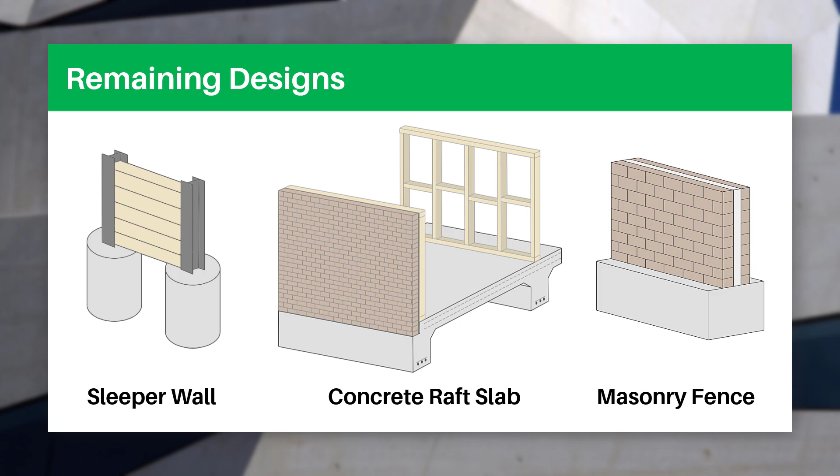In our previous video, we went through our brace frame design, and now we're up to designing our concrete raft slab, our front masonry fence, and the timber sleeper retaining wall to the rear. We'll go through the raft slab first and cover the fence and retaining wall later in the video.

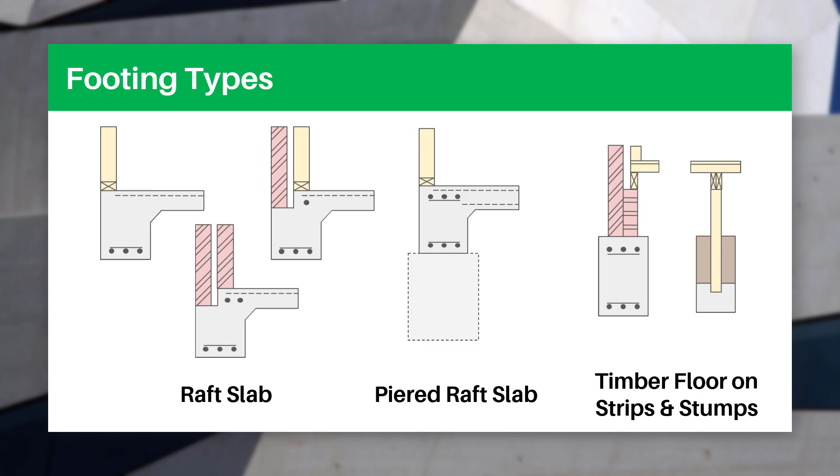Now, depending on the kind of footing system you need to design, your approach to designing it will likely differ a bit. Determining the most appropriate footing system is heavily dependent on your soil profile. We spoke a bit about our soil profile in the first episode, where we first set out our slab. So we'll give a brief overview now.

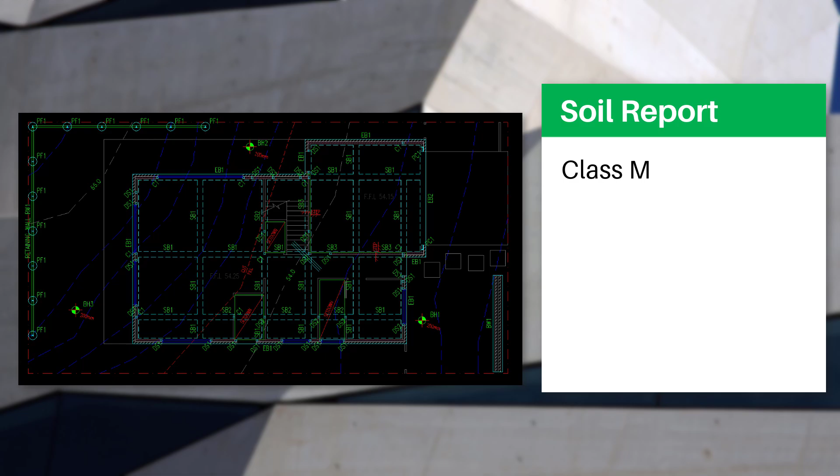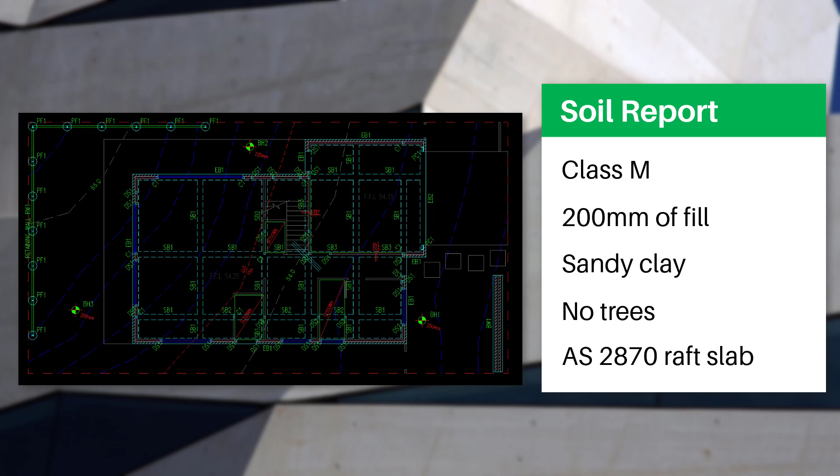Based on our soil report, our site is Class M, and we have roughly 200mm of fill over our sloped site, with our underlying founding material being sandy clay. There are no nearby existing trees or trees that will be planted. Under these conditions, a deemed to comply raft slab from AS 2870 would be appropriate. We'll be founding the beams directly into our sandy clay founding material.

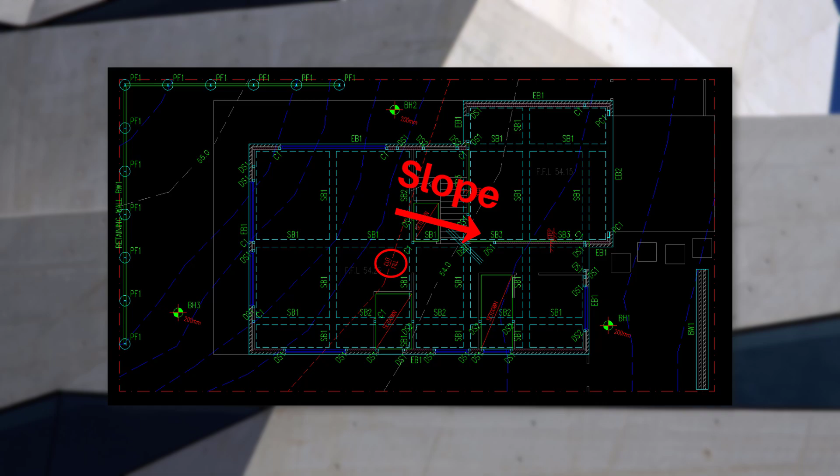In our first episode, we went through in detail the various rules and requirements for the set out of stiffening beams in a raft slab, and so we won't be covering that part of the design again in this video. As the site is slightly sloped, we will be building the site up a bit in areas. This, alongside there being 200mm of fill, means we will be exceeding the 400mm fill limit as specified in AS 2870 clause 2.5.3 for in situ and non-sand filling.

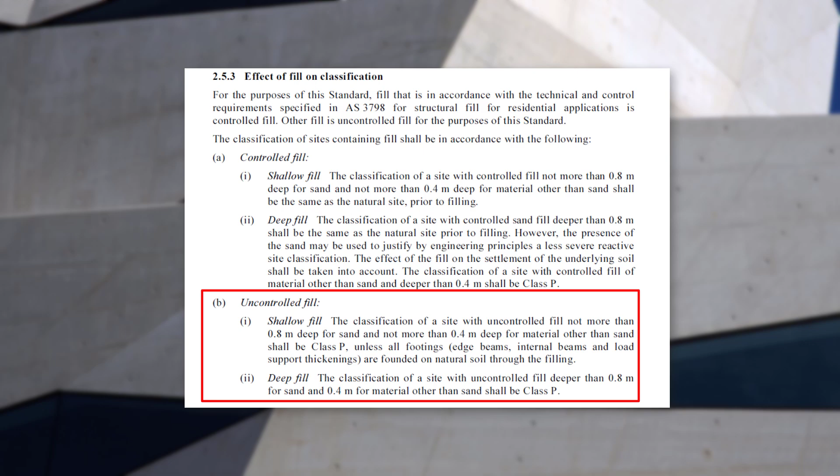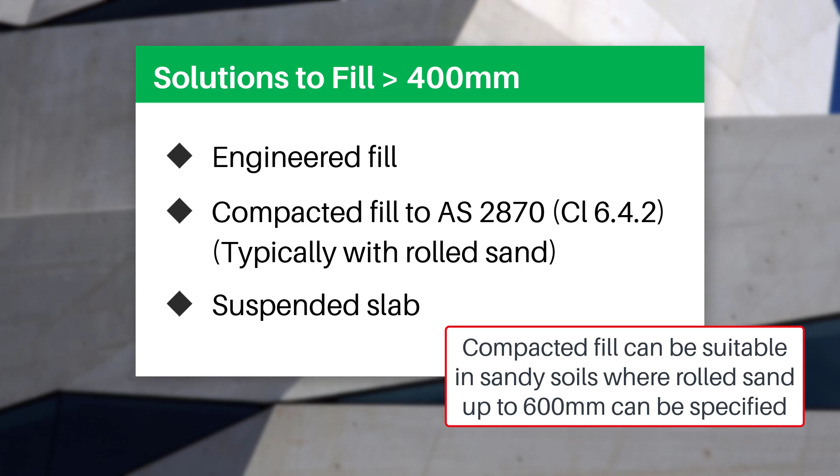There are a few solutions to this, such as engineered fill, or by removing the fill and building up in compacted layers as specified in AS 2870 clause 6.4.2, or by designing the slab as suspended, or in other words, designing the slab so that it can span from beam to beam with no support of the soil underneath. Engineered fill is uncommon for residential projects like this one, so it will likely be more appropriate to go for a suspended slab.

The first part of a slab design is working out where we need to suspend a slab panel. Although a simple approach would be to suspend the entire raft slab, if there are significant portions of it that don't need to be suspended, then this isn't very economical. That being said, the designer will also need to consider the varying performance of on-grade versus suspended when it comes to differential movement. A good way to work out where we need to suspend a slab panel is by calculating the levels of fill below points around various panels. To do this, we can use our finished floor level, contours and fill measurements to work this out.

On our plan, we'll start with the bottom right of our raft slab. Here we have a finished floor level of 54.25. To get to the start of our soil, we'll take off 100mm for the slab. This brings us down to 54.15. Now we need to work out at what level our fill ends. Looking at our contours, we can see our natural surface is about 53.65. We'll then need to go down 200mm from this to account for fill, which brings us to 53.45.

So taking our first calculated value of 54.15 and minusing off our 53.45, we get 700mm of fill. So we know as this edge exceeds 400mm, we'll need to suspend this panel. Going along to the next stiffening beam, we calculate out the fill to be about 600mm, then 450 and finally 350. As we've now gone below the 400mm limit, we know we can stop our suspended slab panels here.

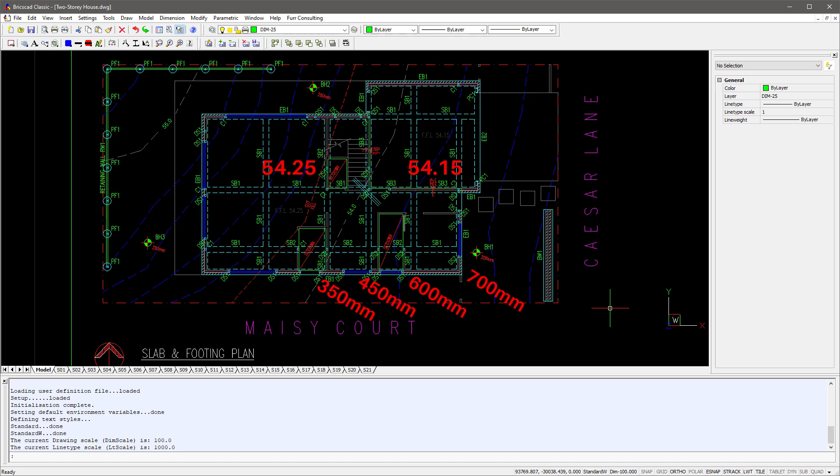However, as our natural surface level isn't uniform going from south to north, we'll need to calculate a few extra points to get a full picture of where we need to suspend. It's also worth noting that our garage floor steps down 100mm from the rest of the slab. With the rest of our points calculated, it will be useful now to draw a line to clearly show the point where fill goes beyond 400mm.

As a side note, a quicker way to go about this would be to just calculate the level where we need to suspend directly and then draw a line based on that. We went about it in a more detailed way just so it's clear what we were doing.

We can see that about half of our garage has more than 400mm of fill, and where we step up, the 400mm line extends into in front of the stairs. Any slab panel that's on the right of this line, or even crosses it, will need to be suspended.

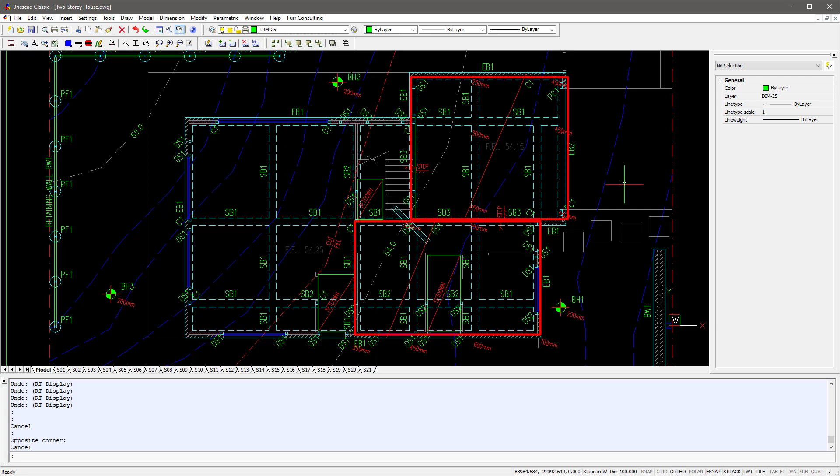We'll need to keep in mind that all these numbers here are somewhat approximate, so we'll want to stay conservative where needed. With that in mind, we'll be wanting to suspend our slab panels up to here for the upper level. For the garage, although technically we could skip the upper left panel, as it's quite small, it's going to be easier just to keep it consistent with the rest of the garage, and so we'll suspend it as well. So that it's clear which panels we are suspending, we'll also add a hatch to them.

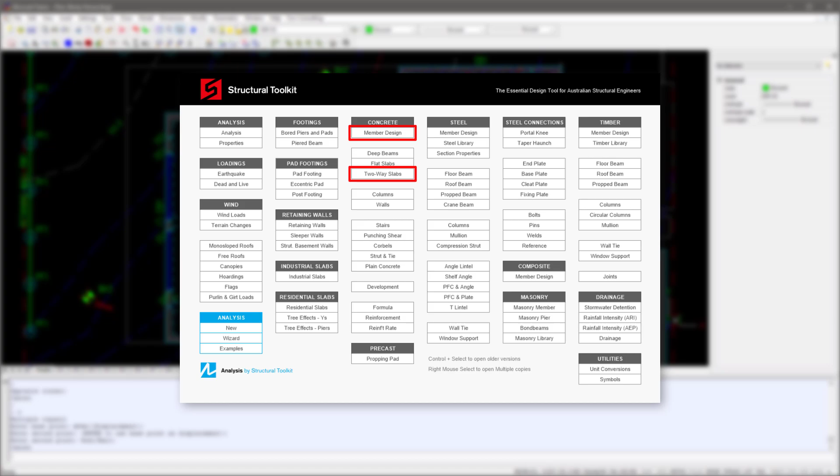With our suspended panels determined, we can look at designing them. We'll be designing them as a two-way slab, using the two-way slabs and concrete member design modules. We've done a video on this kind of design previously. There will be a link to it in the description below, so have a look at that if you're unsure about any part of the process.

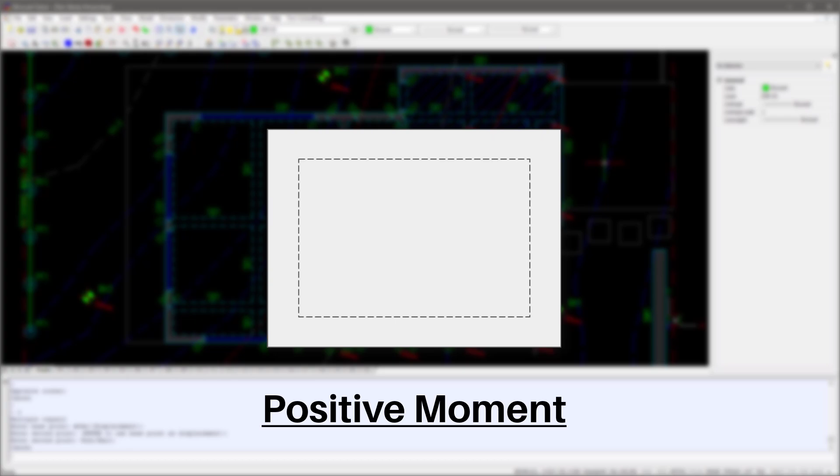We'll want to be selecting panels that will have the highest positive or negative moment in them. The highest negative moment is often found with a corner slab panel with two discontinuous adjacent edges, or a panel that only has a single continuous edge, being similar to that of the first span of a multi-span beam. The highest positive is then usually where there are no continuous edges. As you would expect, the bigger the panel size, the bigger the moments are as well, so there are a few things to consider. So keeping that idea in mind, we'll pick a few slab panels to design.

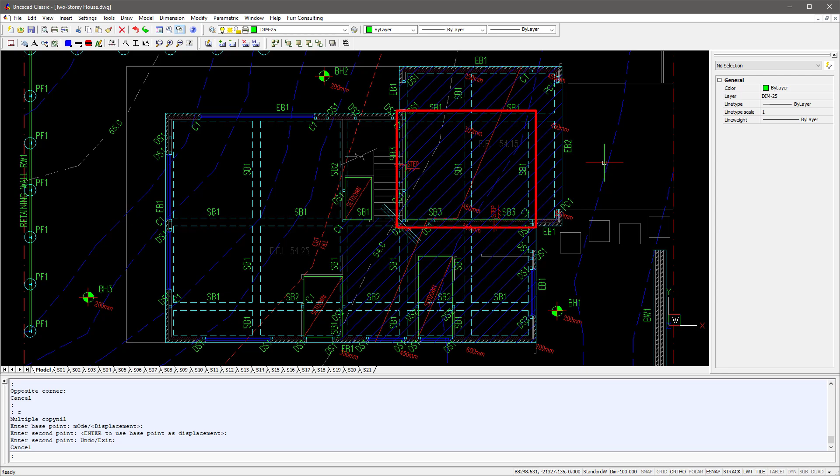We'll also need to remember that our floor dead and live loads will be different for our garage and the rest of the house. The first panels we'll look at will be in the garage. An obvious first choice will be one of the two large panels here we have in the center. Switching over to our STK project, which we've been working on in each episode, we'll create a new section to the left and call it Slab. In here we'll open up our first two-way slab document.

We'll be using a typical concrete strength of 25 MPa and a slab thickness of 130, which is a typical thickness for a suspended slab panel in a residential house like ours. Our reinforcement ductility class will be L, as we'll be using SL82 mesh or similar, depending on what our design ends up as.

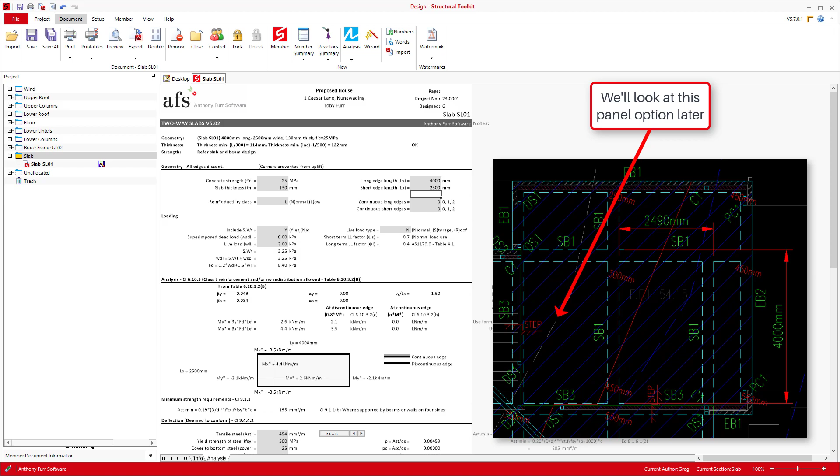If we measure from center to center of our slab panel lengths in both directions, we can see our long edge length is 4 meters, and our short edge length is 2.5. Our continuous edges are 2 for both in this case. So for a garage panel, you'll have a live load of 2.5 kPa, but as our garage will have no floor coverings, our superimposed dead load will be 0.

Down below for our deflection, we'll select our SL82 mesh for now, a cover of 25, and input our compression steel as the same for good measure. We'll be using a deflection limit of span on 250 for total, and span on 500 for incremental, which comes from table 2.3.2 of AS 3600. Incremental deflection is the deflection that takes place after the addition of the brittle partitions or finishes.

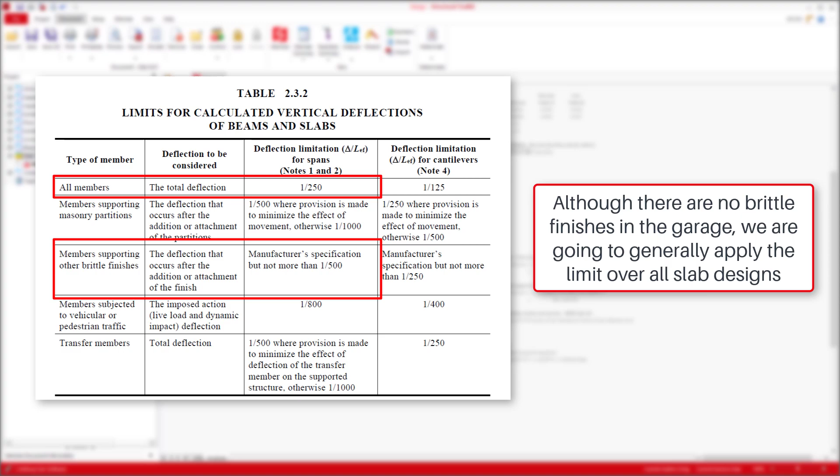We can see our deflection for this panel is okay. Looking at our moments in our panel, we get a maximum of negative 3.6 kilonewton meter per meter and 1.8 kilonewton meter per meter for positive.

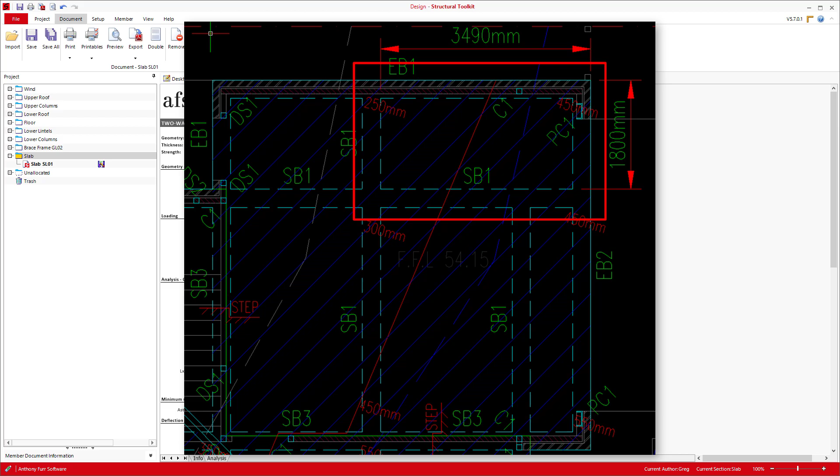Our next slab panel will still be in the garage. We'll pick our corner panel here, which has a few discontinuous edges. This may provide us with a greater negative and positive moment. Measuring the geometry, we have 3.5 meters and 1.8 meters. To make things easier, we'll just copy our first panel document and change the inputs as needed.

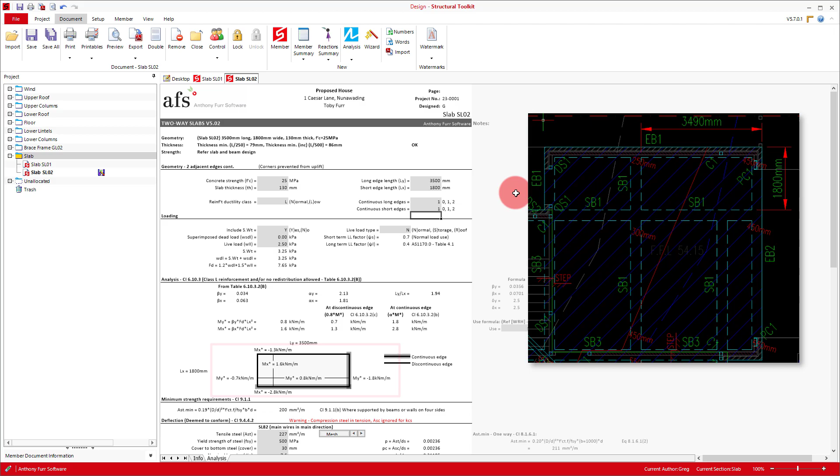As we can see, our continuous edges are 1 for each way. This time we get a maximum negative of 2.8 and positive of 1.6. Next we'll pick a panel that isn't in the garage. We'll pick the panel at the front of the house here, which measures 2.5 metres and 3.25 metres. Skipping ahead, we can see this panel gives us moments of -3.3 and 1.6, which means that our first slab panel had the greatest forces.

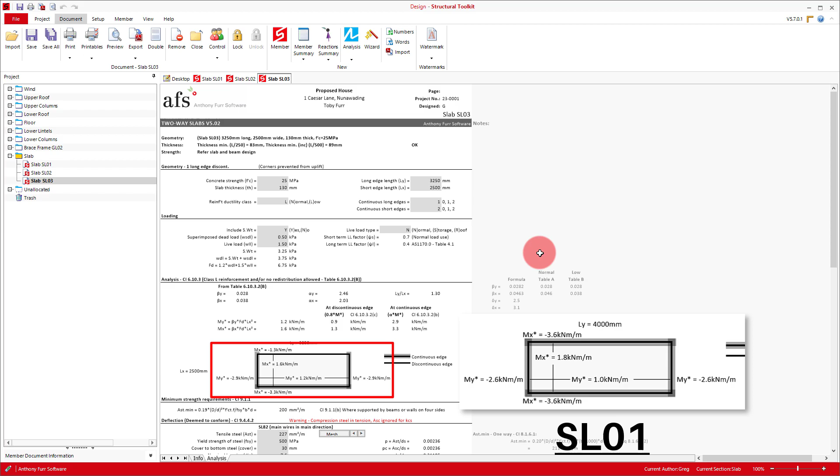However, one more panel we should look at is the garage panel at the rear that's adjacent to the first panel we checked. Here, instead of having 4 continuous suspended edges, at the step our suspended panels stop. Now, although this could be detailed such that the top reinforcement is sufficiently lapped, making it such that the edge becomes somewhat continuous, as this slab panel will be thinner, it's just going to be easier to first check if our design works as it being discontinuous.

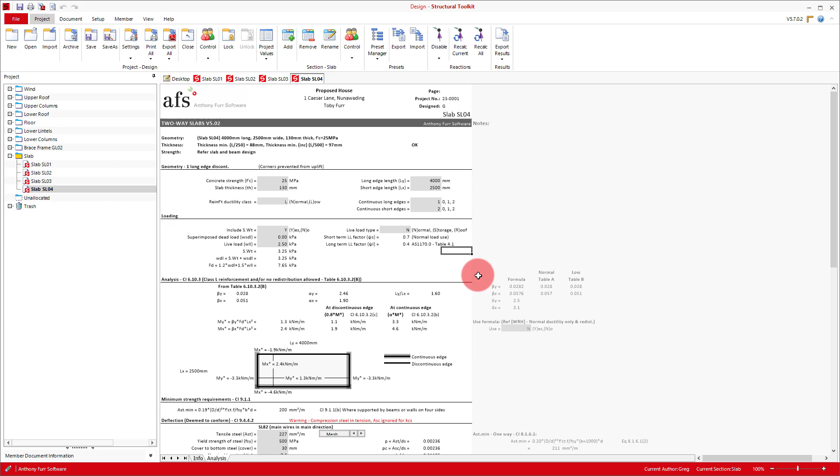So we'll copy our SL01 slab document and set our continuous long edges to 1. This gives us a maximum negative of 4.6 and positive of 2.4, meaning this is our critical slab panel. The next step is to then perform a design check of these moments. We'll start by opening up a concrete member design and call it slab design.

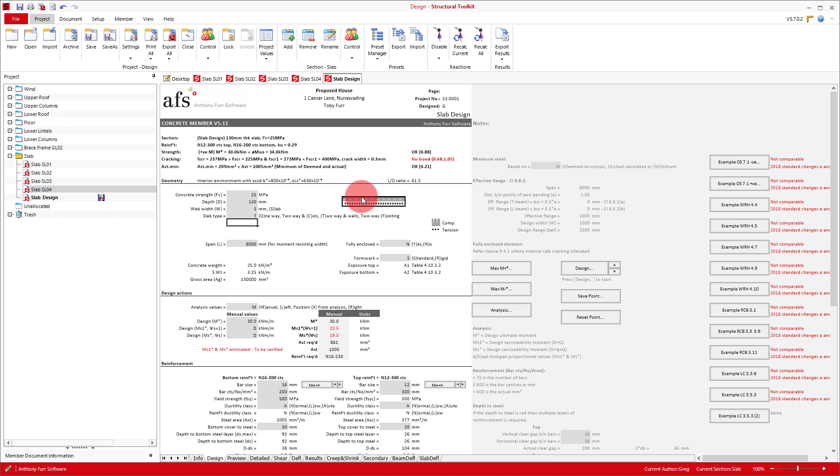We'll enter in the same geometry values as we did before. Our slab type will be T, referring to two-way and walls. Our span isn't relevant for the design we're doing, so we'll leave it as is. We'll input our reinforcement first, then look at our moment input. As discussed, we're going to try using SL82 mesh top and bottom, and for our cover we'll use 30 top and bottom.

So as our reinforcement is the same top and bottom, we actually only need to check our moment of highest magnitude, which if we input as 4.6, we can see works comfortably. Because the bars actually cross each other, the cover to the tensile bars in one direction will be different to the other. So for designs that are close to full capacity, it will be something you need to account for given that the direction the mesh is laid on site is generally not known.

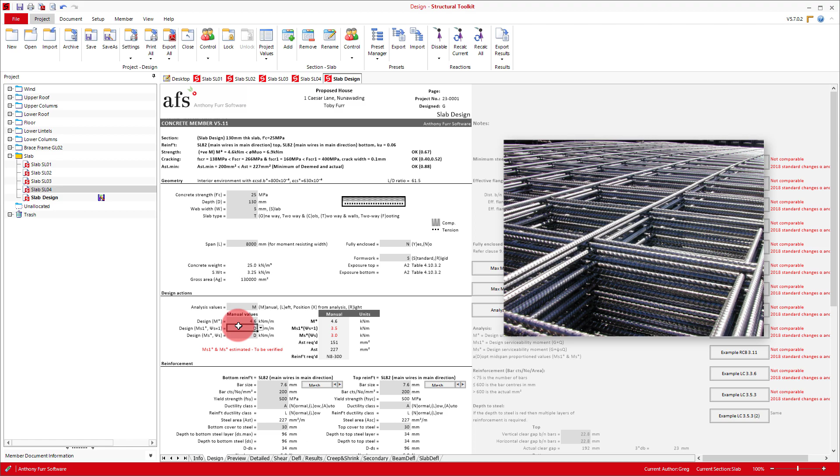If you had to use reinforcement that wasn't the same top and bottom, then you'd create two documents with one being for negative and the other being for positive bending. Alternatively, you could use the snapshot feature, which allows you to store the two sets of design data in the same document. You'll find that the negative moment is generally always larger, and occasionally you may need to increase the mesh size to accommodate that.

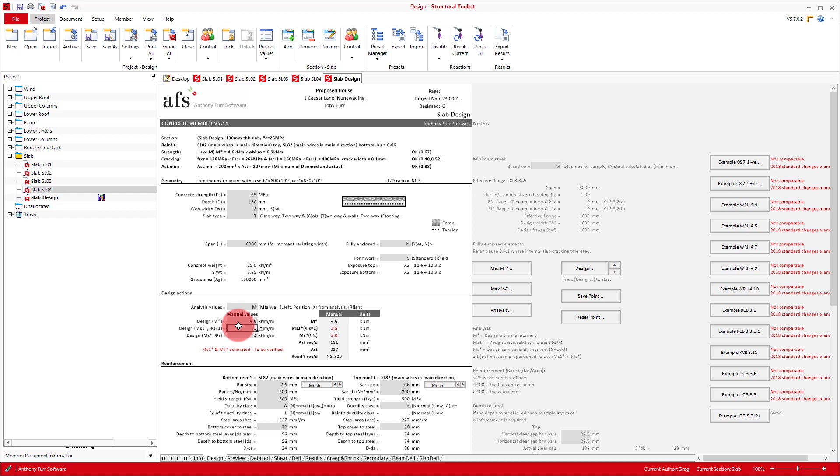With our slab's moment capacity checked, the final part of the main house is to then check that the soil under our edge and stiffening beams has sufficient bearing capacity. One way to do this, in a similar way to how we previously did our column loads, is to set up a plan with all our column reactions on it, which we prepared a few episodes ago. And at critical locations, calculate the total force per metre length of a slab beam. If our bearing force is greater than our bearing capacity, then we'll need to look at adding a pad footing in that location. Our soil report states that our founding material is sandy clay.

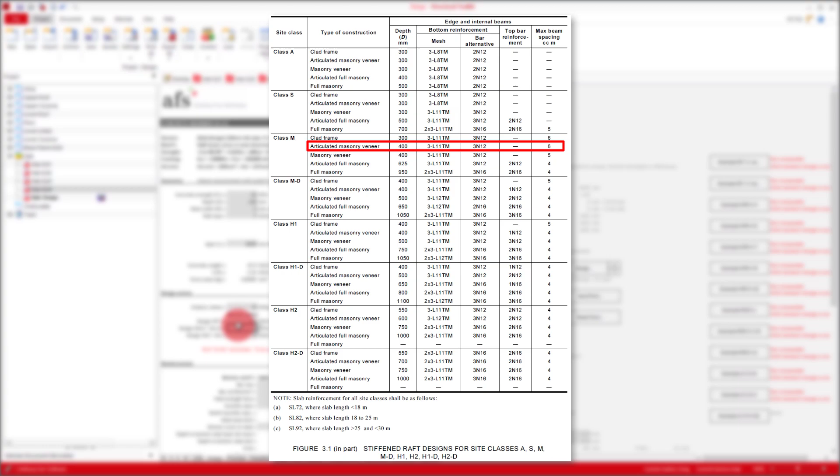In this material, we get a 150 kPa bearing capacity for founding slab edge beams, pad footings and strip footings, and that the footings need to be founded at least 200 mm into this material. We'll be using this bearing capacity then to check our slab beams. For a classification of M, we're using a concrete raft slab and articulated masonry veneer. We'll be looking at edge and internal beams that are 400 deep and 300 wide, being based on figure 3.1 from AS 2870. This means we'll get 150 kPa by 0.3 equaling 45 kilonewtons per metre of bearing capacity for all our beams. We've put this on our footing loads plan to keep things clear.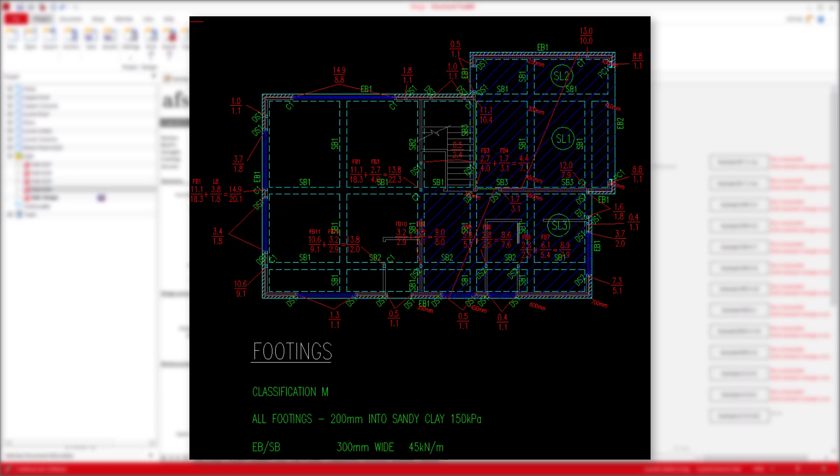Some critical locations to think about will be wherever we have a suspended slab, as this slab will be supported on a beam, and also where we have a high column load. What we'll first try then is our EB1 on the garage external wall to the north side, where we have a point load. On this edge beam, we'll have a combination of roof, brick veneer wall, suspended slab, and also the footing itself. Measuring our floor to top of wall, we get about 3200.

Obviously our brick may go down further than this, but we'll just absorb this into our footing weight. Our roof is about 950. For our slab, we'll need to remember that it is two-way, and so it's not always appropriate to take half the span, as this may be a significant overestimation of what the actual load would be.

In our case, to demonstrate, we'll draw lines at 45 degrees from the corners to see exactly what our distribution would be like for our EB1 here. As our slab panel is quite long and slim, in this case taking half the span will be appropriate, as we can see. We'll take our edge beam slab weight to be to the face of the footing in this case, as the additional live load mass that would be on our edge beam here is negligible. For an internal beam or an edge beam with just light clad stud, you probably wouldn't do this.

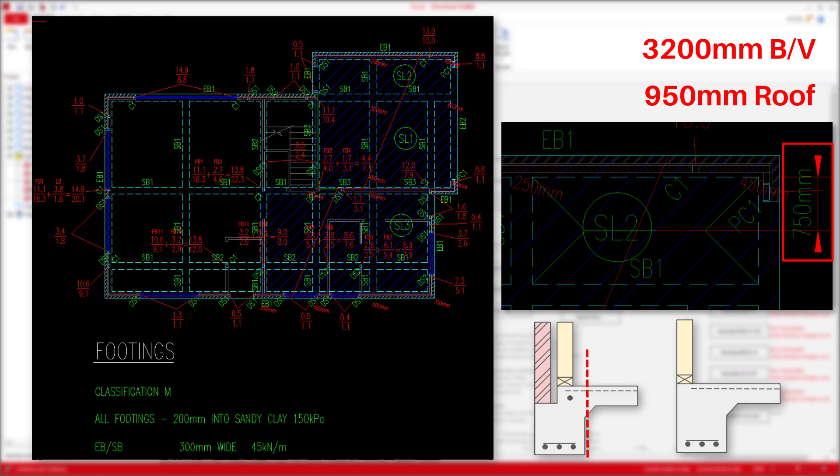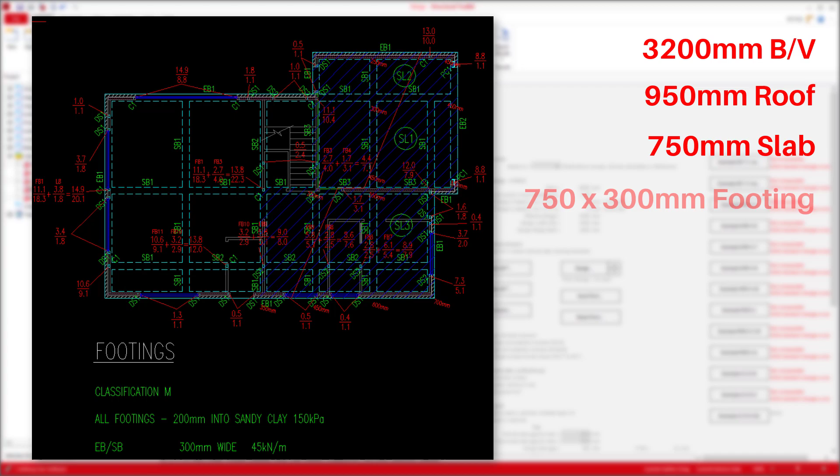Here we can measure out 750mm. Finally, we have our footing, which is 300 wide, and although the minimum depth is 400, at this location we have a bit of fill, and as we'll need to found down at least 200mm into the founding material, we'll need a footing about 750 deep from floor level. So there will need to be some level of blinding concrete below our 400 deep edge beam. So for our footing weight, we'll take it as 750 by 300.

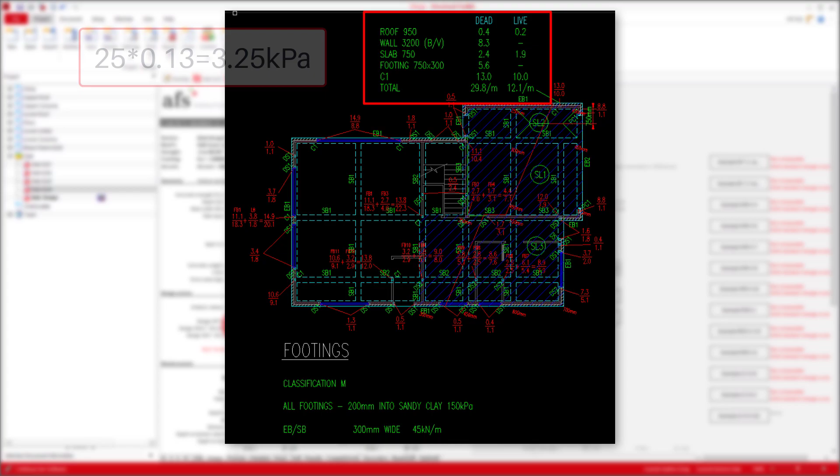Summarising these lengths into a list here, we can then calculate out their weights. For roof, it's 0.4 kPa dead and 0.25 kPa live. This gives us 0.4 kilonewtons dead and 0.2 kilonewtons live. Continuing on, we have 2.6 kPa for wall weight, and for our slab will be 3.25 kPa for dead, with no superimposed 0.5 as it is garage, but then 2.5 kPa live. Refer to our previous episodes for further explanations on material weights used.

We then have our footing, which will be a 25 kilonewtons per metre cubed weight. There is the argument that you can just use 6 kilonewtons per metre cubed, as you are removing soil to add the footing, with 6 being the difference in density from soil to concrete. But care should be taken when the edge beam is founding through predominantly fill. We'll see how we go without this reduction for now.

Finally is our C1, which we already have the forces for. Calculating out all our forces gives us a total of 29.8 kilonewtons per metre dead and 12.1 kilonewtons per metre live. The total of this is less than our capacity of 45, so we are okay for this edge beam.

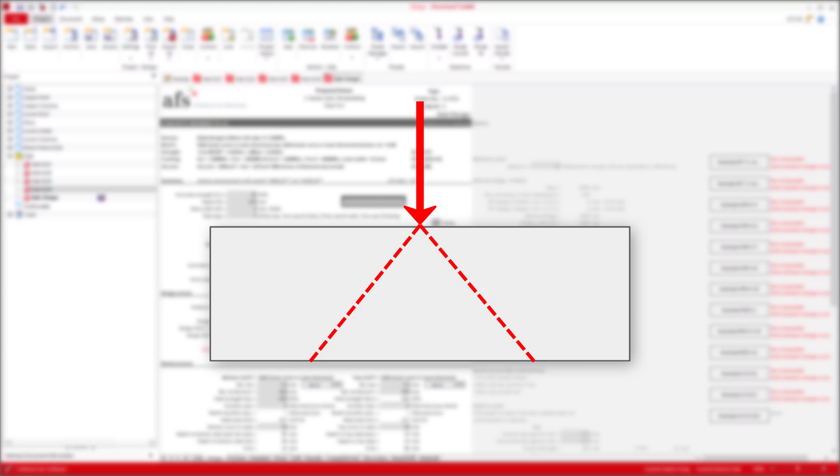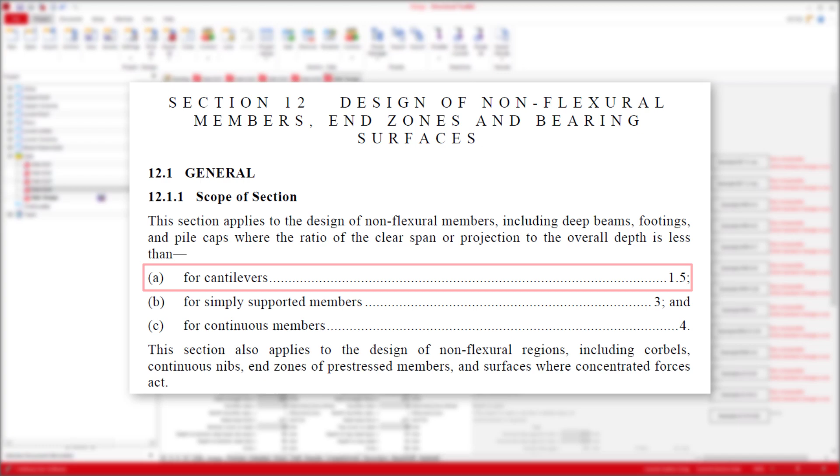Where a point load is supported on an edge or internal beam, the point load distributes within the footing over some length. For simplicity, we have used 1 metre or 500 each way. If we look at section 12 of the concrete code, it refers to a non-flexural member having a cantilever of 1.5D, so you could probably justify 3D. We'll do a few more of these and see how we go. The process will be the same for the rest, keeping in mind that our beams to the left won't have a slab component as they aren't suspended.

Skipping ahead, we've completed 2 more critical locations. One under the C1 being the garage and entrance, which came out to be well under capacity, and also one in the back living room under the C1 here. We can see this one did get close to our 45 kilonewton limit. However, our approach to working out our loads here is conservative, so there are a few things we could try to reduce our loads if needed.

For example, our load is per metre, directly under the column. We have 500mm to the left that is load bearing and 500mm to the right which is just a window load under the lintel the column supports. So you could argue that anything from above the ground floor will only contribute to 500mm of the 1 metre strip. So we could halve our roof, walls and floor loads from above, though we would still need to keep some amount of the wall to the right as we still have the window.

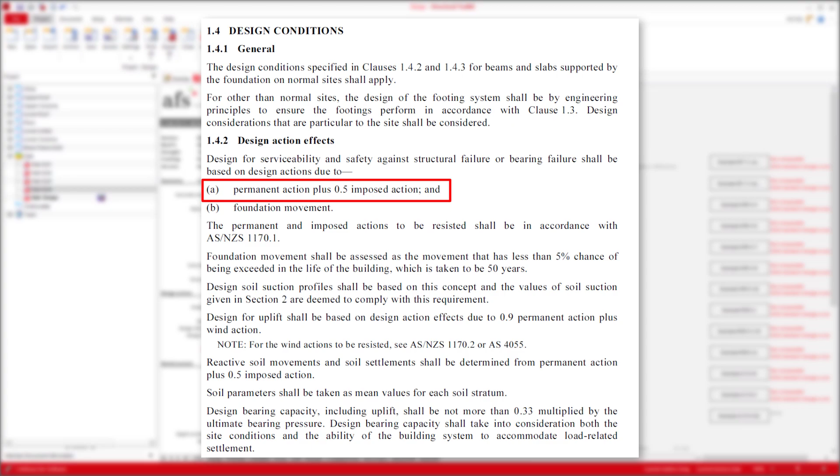Other options we have for refining our loads include AS 2870 allowing the use of half the live load as per clause 1.4.2a for bearing, or possibly looking at the density of our footing not being 25 kilonewtons per metre cubed due to soil removal, as we discussed earlier.

If you end up not being able to get your beam to work, then you would need to look at providing a localised square pad or similar within the raft slab, in order to increase your bearing area sufficiently. You should also be conscious of having too great a differential of bearing pressures under the footings, as this may lead to differential settlements. For our slab here, these 3 checks should be sufficient for our bearing.

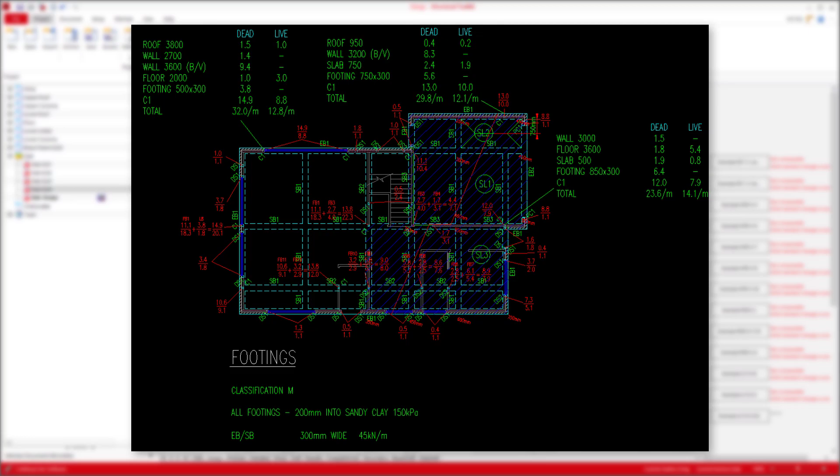This then finishes off the design of our 2-storey house, with all that's left being our external retaining wall and the front fence. First we'll start with our sleeper retaining wall. The first thing we'll want to work out is our maximum retaining height. The backyard will be levelled to 300 below the internal floor height, so at a level of 53.95. Looking at our contours, we can see at the corner we get up to about 55.3. So our maximum retaining height is about 1.35 metres, which will round up to 1.4.

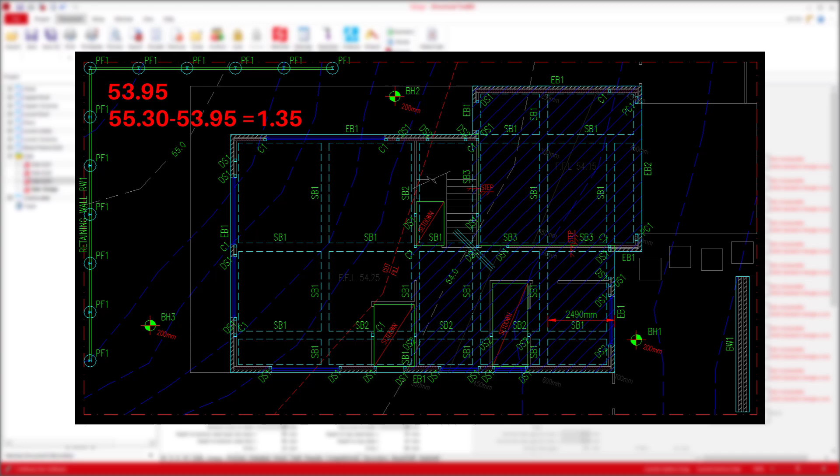Often the building designer will specify a maximum required retaining height as well, which you should always check against the contours. We can see our retaining wall height will vary along the boundary, so we will probably do a couple of design options for different heights. So we'll first start by creating another section called retaining wall. In here we'll open up a sleeper retaining wall module and call it sleeper wall RW01 1400 to indicate its maximum height.

We've done a video on this module previously where we designed a concrete sleeper wall. A link will be in the description below, so check that out if you're unsure about anything. The version of the module we are using now has been updated a bit since that video, with there being a few newer options available for the footing overturning check.

So starting with our geometry, our retaining wall height is 1400. For our post centres, 1800 is a good place to start, but we can decrease it later if deemed necessary. Our uprights will be steel and our sleepers will be timber, so we can leave these options as they are. We'll be using a typical 100 UC upright with 100 by 200 F5 sleepers. Our risk class will be left with B as we are on the boundary.

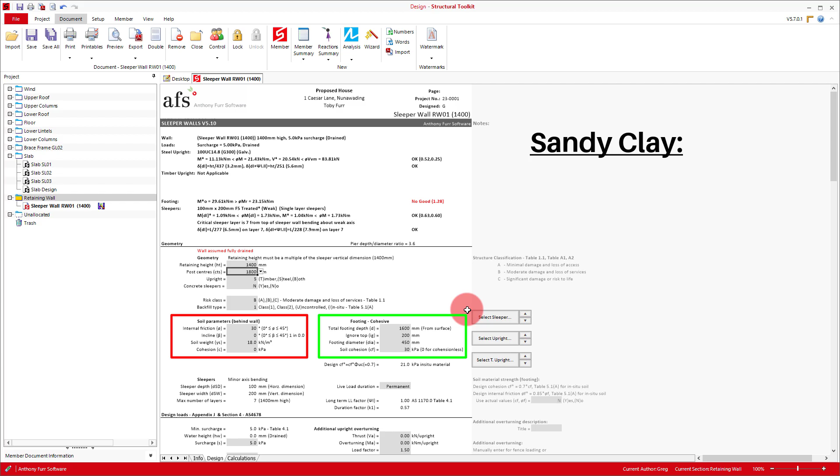Next we have our soil parameters for behind the wall and then around the footing. Our geotech has provided us with some retaining wall design parameters for the different layers of soil on the site. Our 200mm fill layer has no parameters. For our sandy clay we have a cohesion of 35 kPa and internal angle of friction of 30, with a factor of safety already applied. We already have 30 degrees in our soil behind the wall, so we'll leave it as that. On the other side of the boundary, the soil level will be flat, so we won't have any incline.

Now, although we have been provided with a cohesion value for our sandy clay from 200mm down, providing any amount of cohesion to the soil behind the wall will have an extremely significant effect on the overturning moment induced. Applying just a small portion of this cohesion will effectively negate the entire overturning moment in our case, being a result of the developed crack depth that occurs in the drained state.

A typical approach taken here is to use zero cohesion. In reality, even if the wall is constructed in an area where the soil is cut near vertically, there will always be some level of non-cohesive or granular backfill used to fill out the back of the wall. So for now we'll leave this input as 0.

For our footing depth we'll put in a tentative 1800 and ignore 200mm of topsoil. The amount you ignore is affected by the ability of the founding clay material to dry and shrink. This amount will vary depending on if the area is paved, unpaved, topsoiled, etc. We'll keep our footing diameter as 450 for now, as this is a typical size.

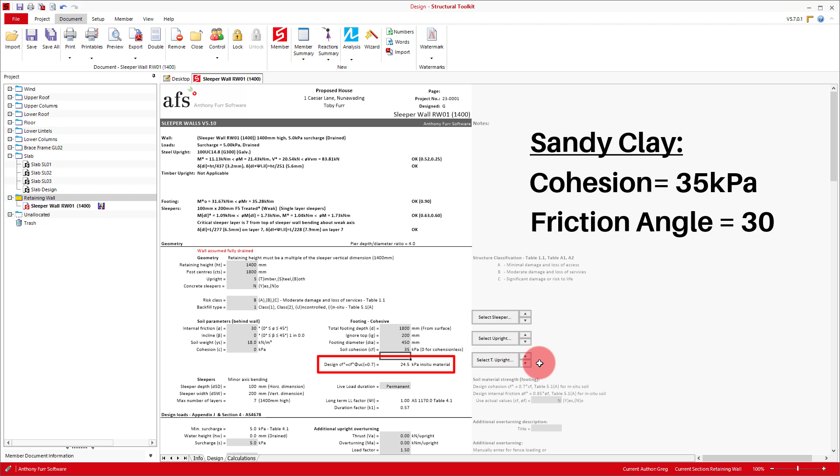Our cohesion for the footing is then 35 kPa. This is modified further by a reduction factor for in situ soil of 0.7 from AS 4678 Earth Retaining Structures Table 5.1a. Now, as our sleeper wall is next to the boundary, it will have a fence attached to the uprights. This means there will be an additional wind load from the fence we need to consider in our design.

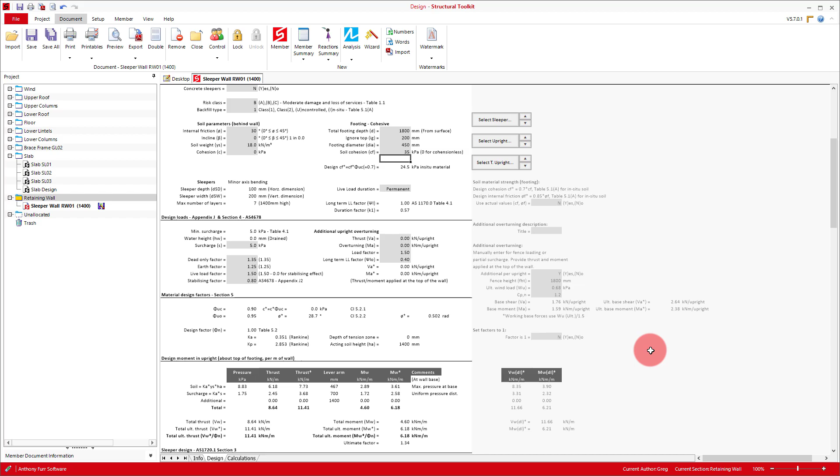We'll use the calculator to the right to work out what this force will be. Our fence will be 1800 high. Our wind load is already in there thanks to the project values we set up in an earlier episode. We did a video on how to do this previously, so check that out if you're interested. We could look at refining this shape factor, but we will adopt 1.2 for this case.

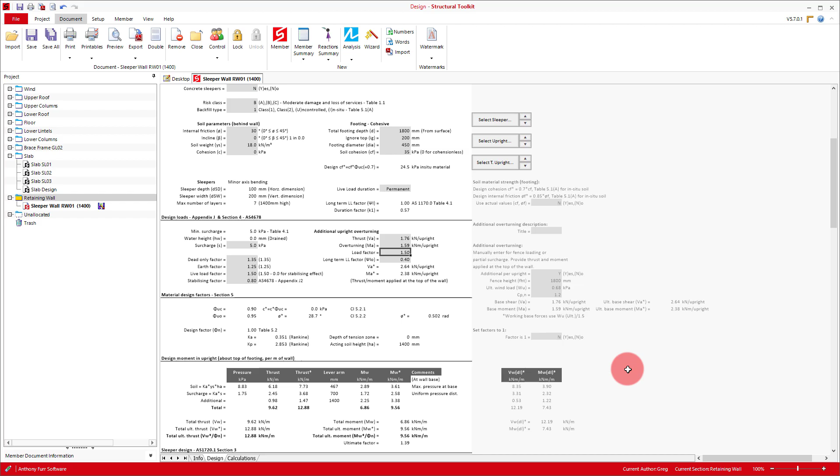As we already have a load factor input to the left, we'll link the thrust and overturning cells to the base shear and moment values. The rest of our inputs here are fine as they are. Going down to the bottom, there are a few additional options for the overturning check. The important one for us is where our overturning moment is resolved to.

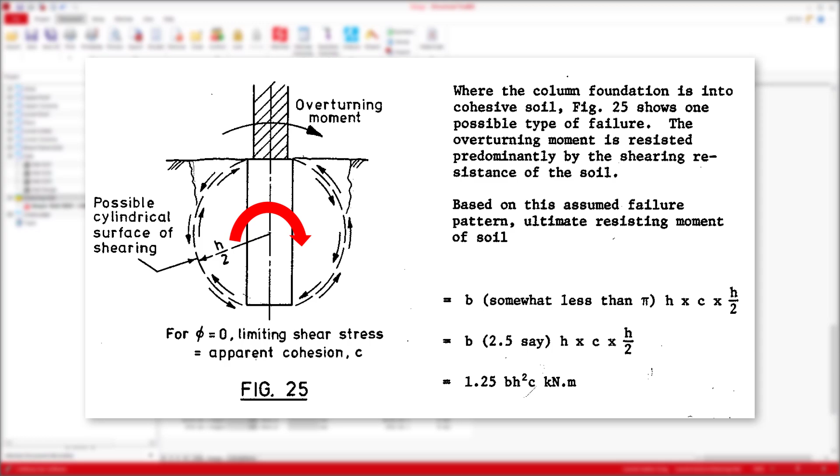Hoskin's method appears to apply the moment at the top of the footing and ignores shear. However, a more conservative approach will be to resolve this shear to the centre of rotation. In our case, we won't be resolving our forces to the centre of rotation, so we'll turn this option off. We have a document on our website covering this option in more detail, so check that out if you need.

Going back to our design above, we can see all our checks are okay, and so we can probably reduce the depth of our footing. In our case, we'll reduce it down to 1500. Next, we'll want to design a shorter retaining wall that won't need as much footing embedment. In our case, a good height might be 1 meter, so we'll copy this and name it accordingly.

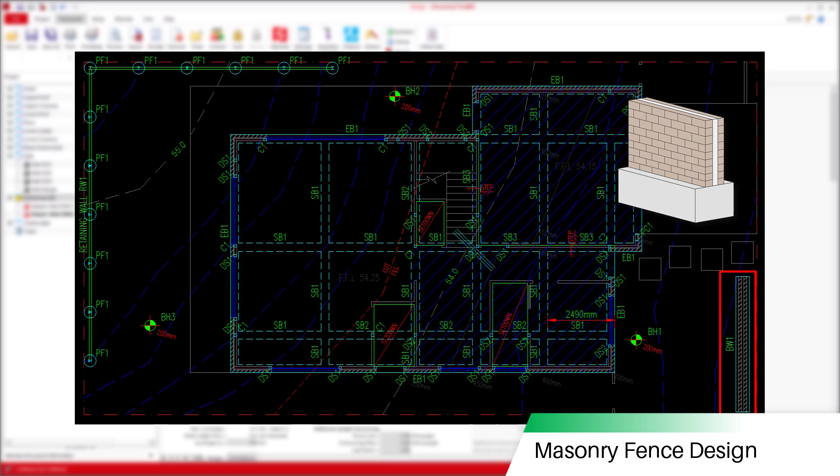For our 1 meter high retaining wall, we'll be able to reduce the footing down to 1200. For a retaining wall like ours, 2 options will probably be enough. So our final design of our series will be the front masonry fence. There isn't a retaining aspect to it, so it'll be purely designed as an overturning structure due to wind.

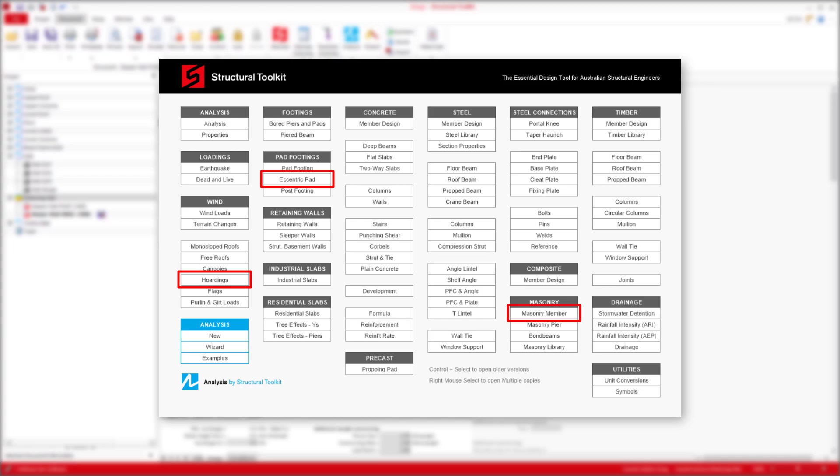We did a similar design for this in a previous video, so check that out if you're unsure about any aspect of it. To complete the design, we'll be using the hoarding, masonry member design, and eccentric pad design modules. We'll create a new section to keep things organised and call it fence. We'll start with the hoardings module.

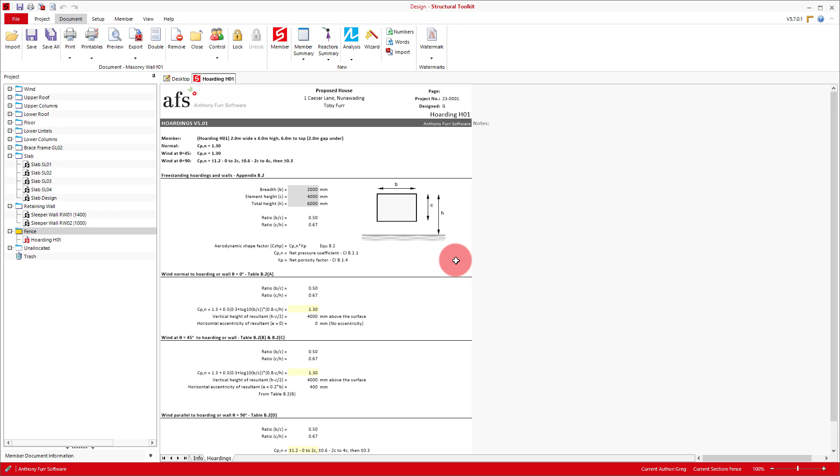Our wall is going to be 5 meters wide and 1800 tall from ground level. To account for some level of built-in tolerance and the fact that the bottom of the wall will be 75 to 100 mil below the ground, we'll design for a max of 1900. This gives us a CPN of 1.23. Next is the masonry member design.

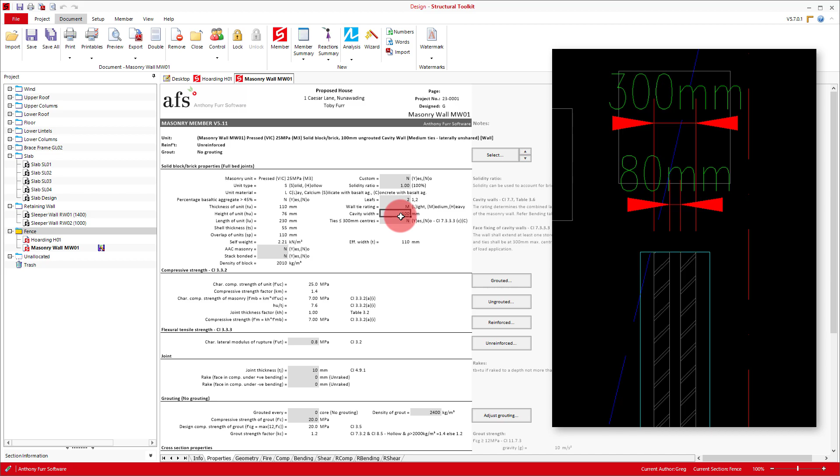Our wall is double brick with 80 mil cavity. We'll pick a 25 MPa compressed brick, noting that you must specify this compressive capacity on your standard drawings. We'll input our 2 leaves and put in a cavity width of 80. We'll start with looking at a fully grouted but unreinforced section, so we'll need to click the grouted button to the right, and for now, leaving our reinforcement input as 0.

Next on our geometry tab, we'll put in our length of 5 meters, our height of 1900. We'll be doing free on both sides and the top, and rotational on the bottom. There are no warnings at the moment, but if we increase this fence to 2700, we can see that a warning comes up stating that the unreinforced wall is too slender. As for robustness, a minimum of 0.5 kPa must be applied, resulting in a moment of 1.82 kilonewton meters, being greater than our capacity of 1.8.

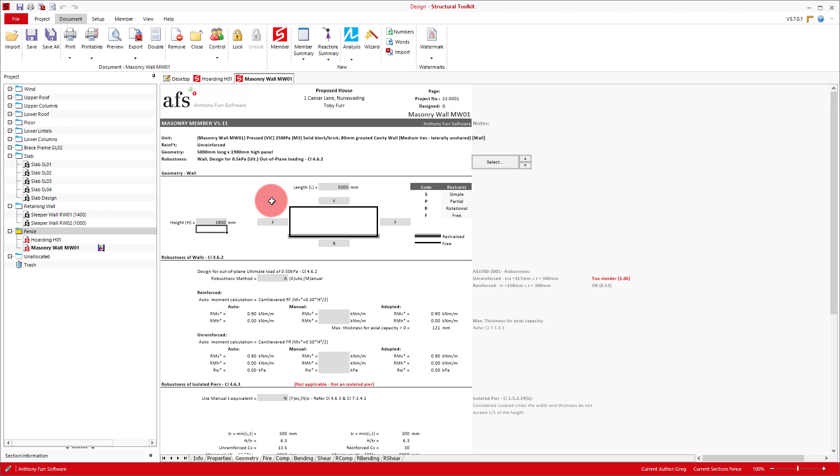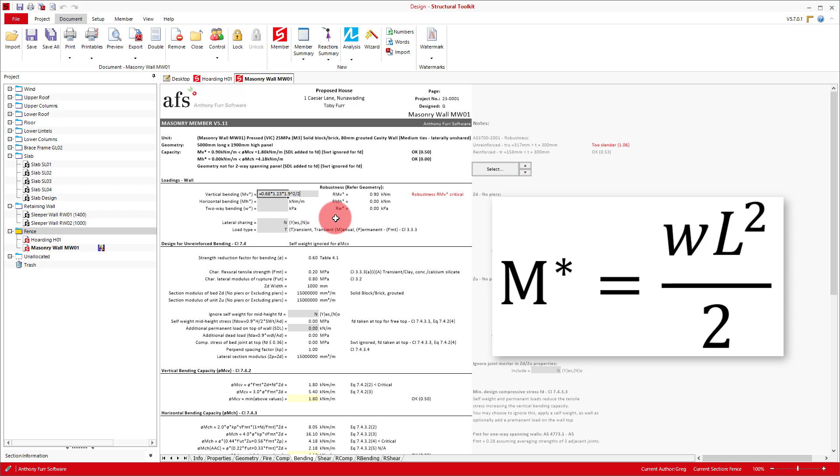Next, we'll be looking at our unreinforced bending tab. Our moment will be based on our cantilever wall with a wind UDL applied to it. This will be WL squared on 2, which we can calculate in our cell. For our wind pressure, this will be 0.68 times our shape factor of 1.23, which forms our UDL component. And then for L squared on 2, our length will be 1.9 to the power of 2 on 2. This gives us a moment of 1.51 kilonewton meter per meter. So that it's clear what we've done, we'll make it a comment.

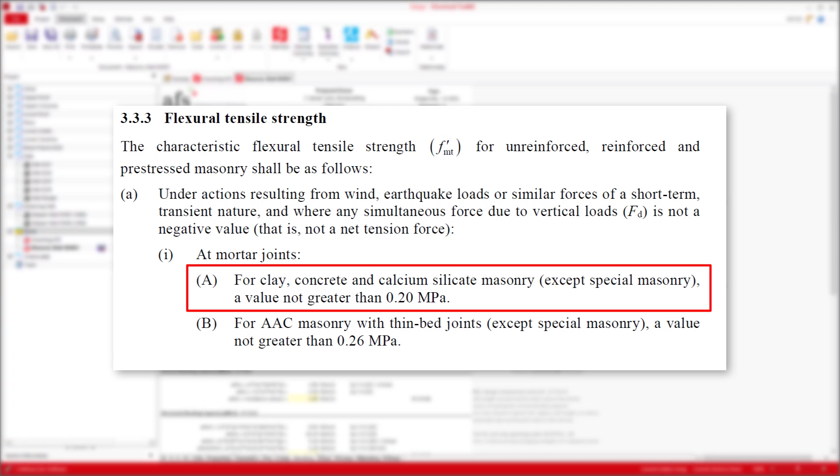For transient loadings such as wind or short-term forces, AS 3700 clause 3.3.3 allows an f'mt of 0.2 MPa, which allows the fence to cantilever unreinforced with a capacity of 1.8, meaning our unreinforced design is okay. However, something we need to consider is that footing movements and small impacts can quickly compromise the brickwork to have no capacity. So we will now look at the capacity of the fence with an N12 bar every 1200 millimeters.

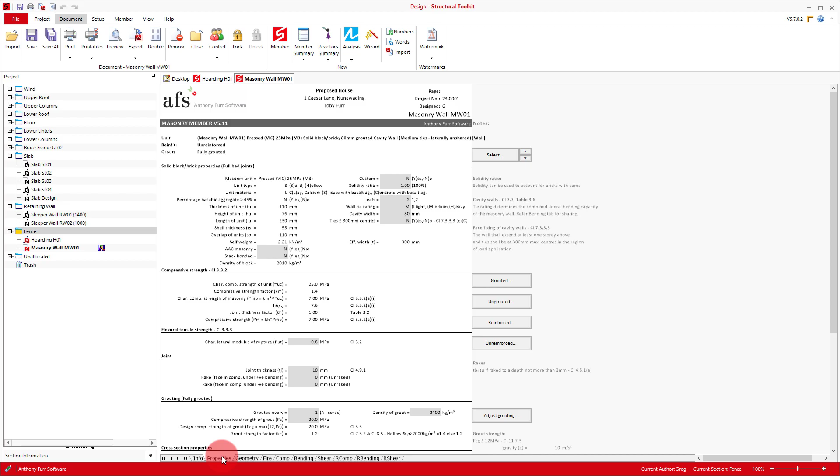This gives us a capacity of 5.14 kilonewton meter per meter. This option works comfortably and will be the design we will go with. You may also want to consider providing horizontal reinforcement.

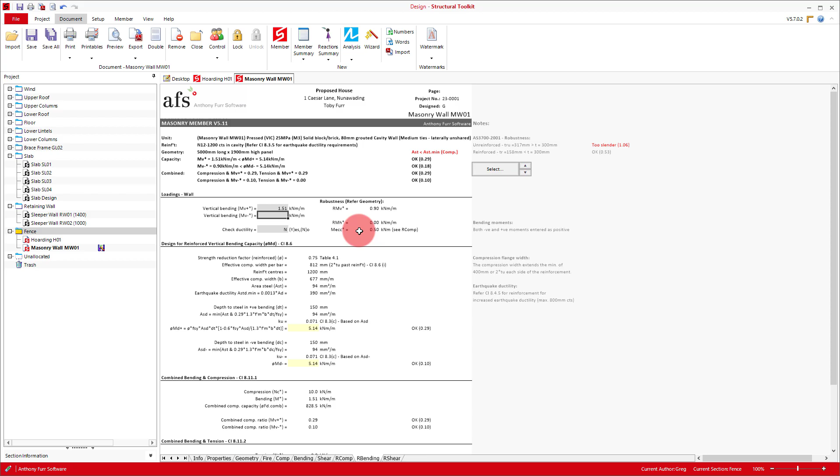Next is then our footing check, which we'll be using the eccentric pad for. The eccentric pad has been updated a bit since we did the video on it a while back. We now have some more comprehensive bearing calculations for footings with larger eccentricities in both directions, along with shear and moment along the footing.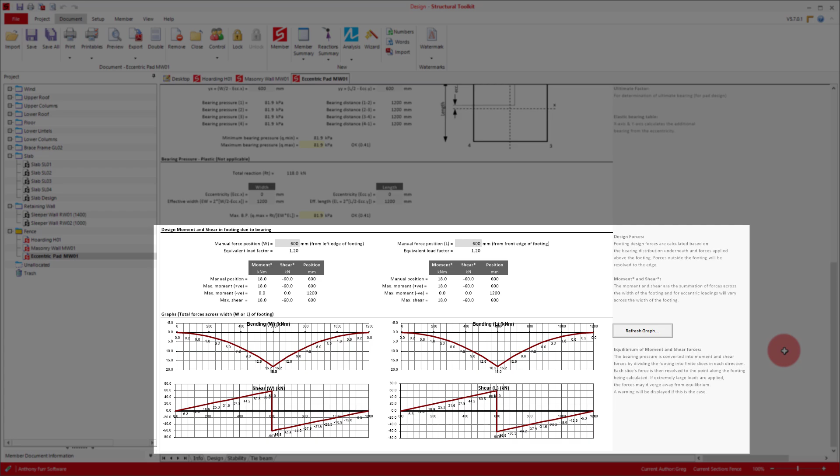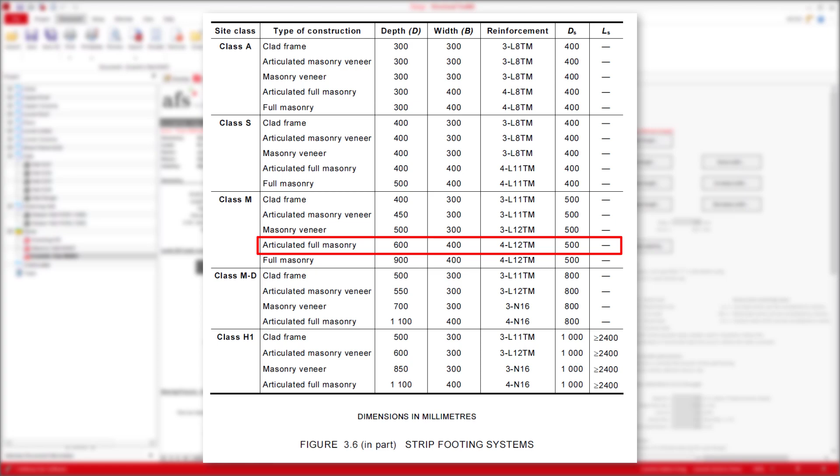For our design, we'll start with a width of 600 millimeters and see how we go. For our length, we'll be going with 1 meter to keep it with our forces also being in a per meter length. For our depth, we'll go with 600. A Class M strip footing with articulated double brick above specifies 600, so for our reinforced wall, 600 will be a suitable depth. Our allowable bearing pressure is 150 kPa.

Our first force will be our dead load due to our brickwork. This is 300 mm thick and 1.9 meters high. We'll use 22 kilonewtons per meter cubed density, noting the density of clay bricks can vary from 1500 to 2000 kilograms per meter cubed. But we also have 80 mm of concrete grouting. This gives us 12.5 kilonewtons per meter.

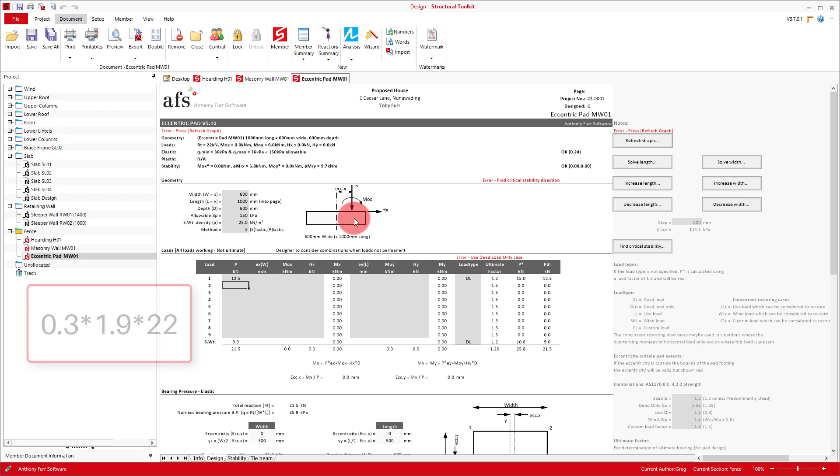Our next load is then our wind load. We'll copy the formula we used in our masonry wall design. As the ultimate factor is 1.5, we'll need to divide this formula by 1.5 to get it back to working. We'll also need to add the shear component, which will just be our UDL times our height divided by 1.5 again. We'll then set this as a wind load.

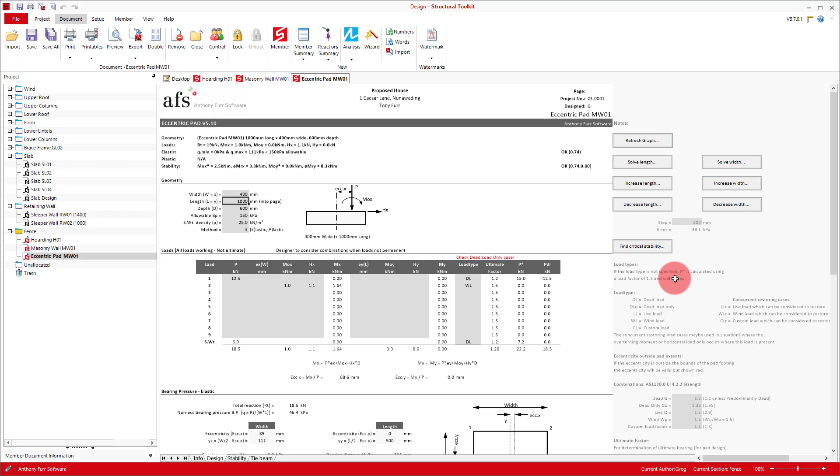We can see that our footing is working comfortably at the moment, so what we can try and do is reduce down our footing's width to say 400 mm. Any smaller than this is probably a bit too impractical for our double brick wall. As we don't have an eccentricity on our footing, it's able to work fairly easily for a smaller width footing than you might get if the wall was directly on the boundary.

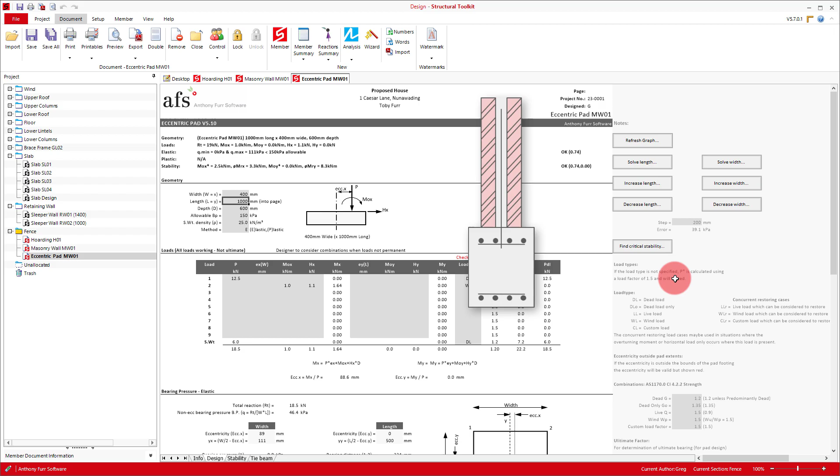For our strip footing, we'll probably go with reinforcement similar to L11 or L12 trench mesh with 4 main bars top and bottom. For a 400 wide footing, you would provide 4 bars and then for each 100 wider an additional bar. In situations where the footing gets wider, you will need to use the bending moment and shear shown at the bottom to check for any required reinforcement.

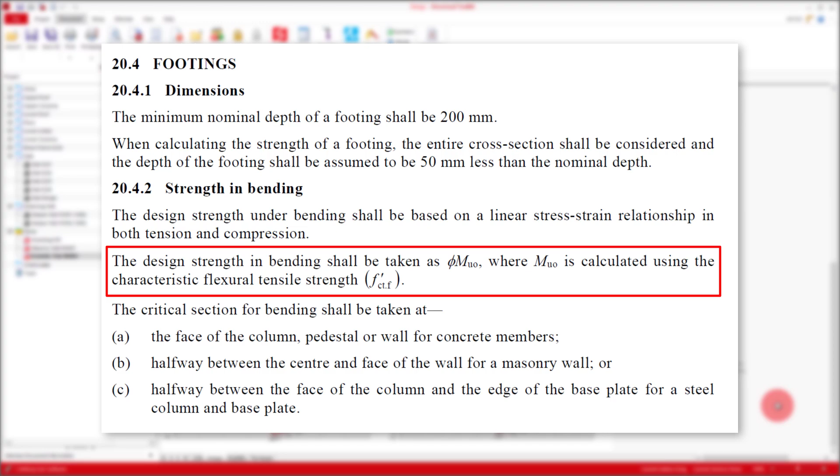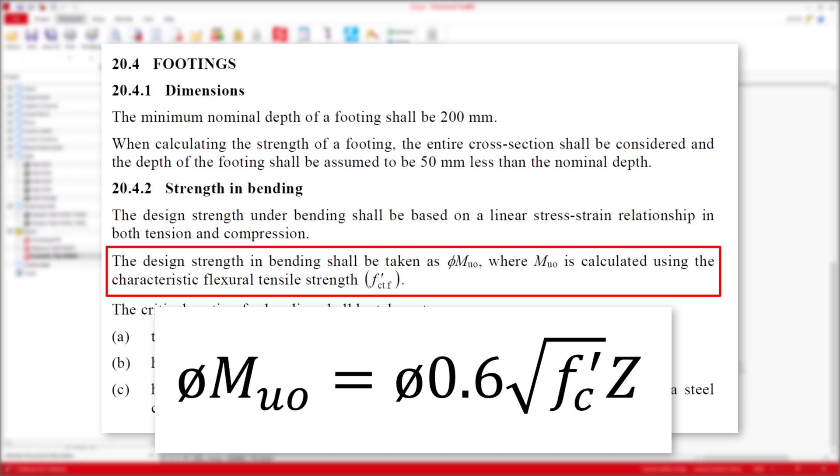One way of doing this would be with clause 20.4.2 of AS 3600 for unreinforced footings, where you can calculate the φMuo of the footing, which equals φ times 0.6 times the square root of f'c times Z, making sure you use a depth that is 50 mm less than the total depth.

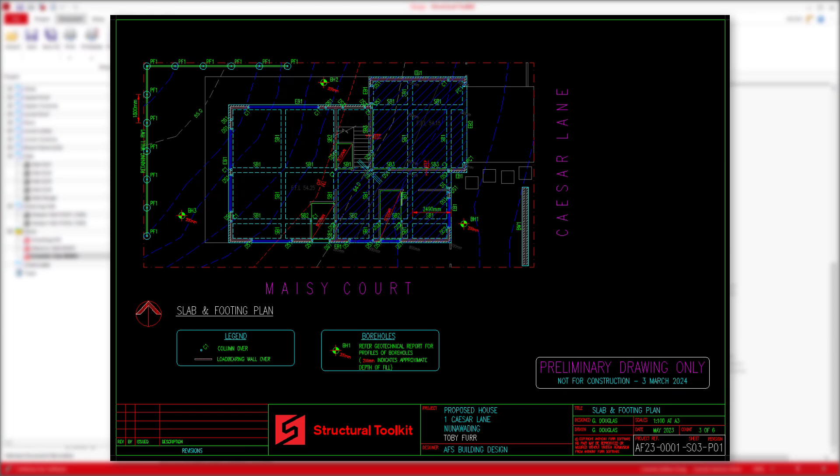With our masonry fence designed, we've effectively designed everything we need to for this project. At this point, you would start filling out schedules, drawing details and adding any additional notes to the drawings that are needed to appropriately convey our design through our drawings. For example, we would want to add a note to our slab outlining the slab thickness and reinforcement we have adopted,

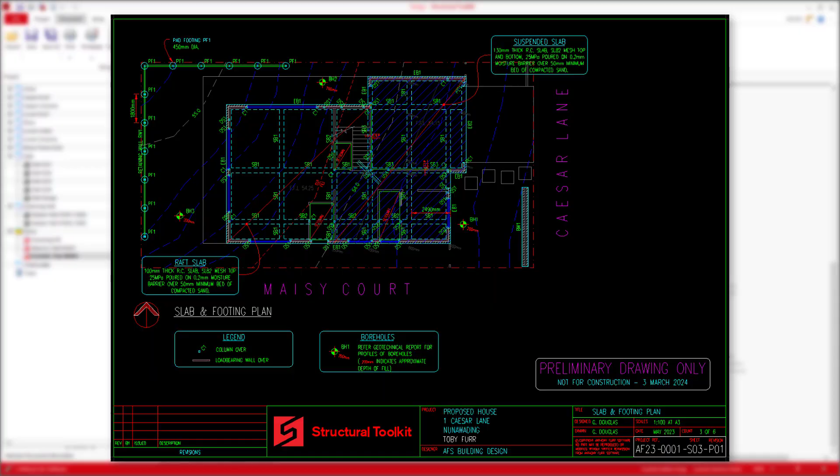and dimension out our sleeper wall so that it is clear what size footing we have specified, and also the spacing of each upright. You may find that as you are detailing things that certain design sizes may not fit, and so you will need to go back and rethink things. A project like this can sometimes be a bit of an iterative process. There is a lot to think about even when just designing a typical two-storey house. And with that, we've come to the end of the design series.